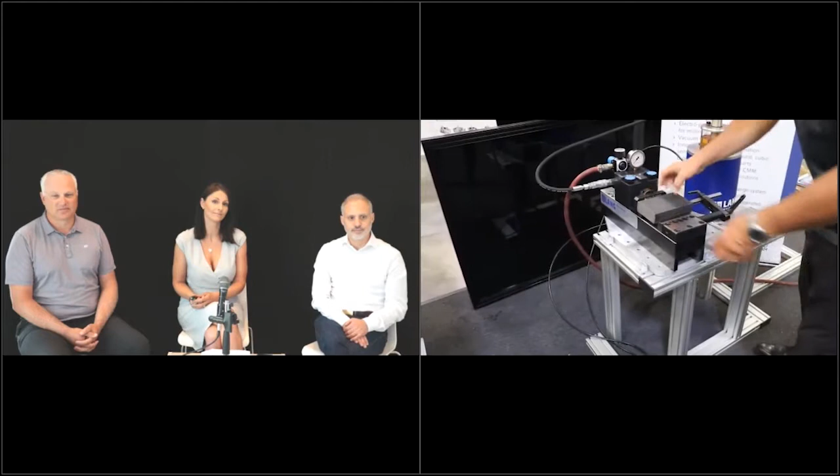As you can see right here, we start with a raw material block, a 1045 mild steel being pre-stamped by the Lang Makro-Grip stamping unit.

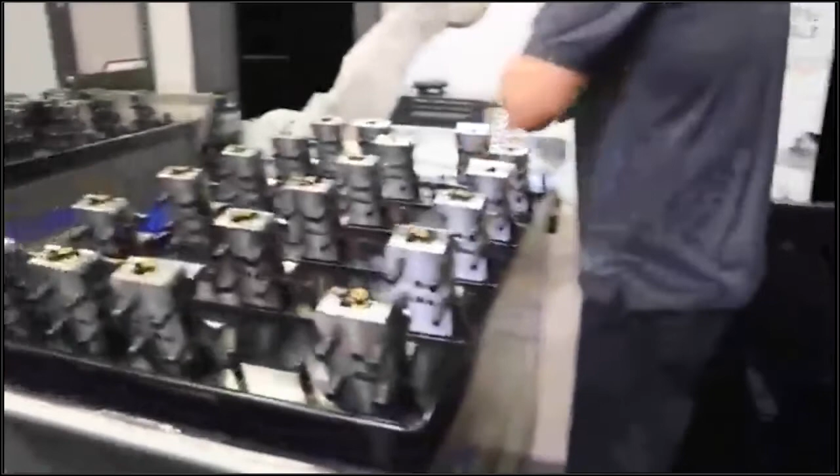This unit is optional, but recommended for harder material above 35 HRC. The form closure effect created by the pre-stamping of the workpiece ensures you hold the workpiece with constant and consistent quality and high process reliability.

Now, all that's left is to clamp your workpiece onto the Lang Makro-Grip vise, which doesn't even need to be removed from the trolley. The automation trolleys are simply mobile storage units.

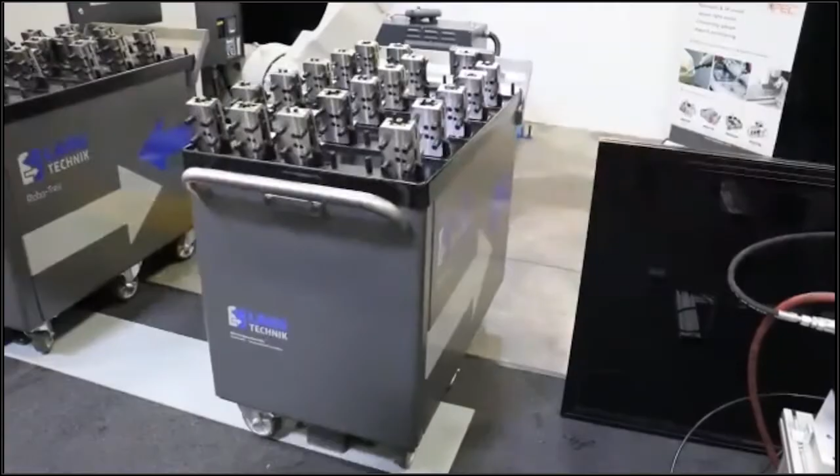Once all of your workpieces are positioned into the trolley, it's time to dock the trolley into a pneumatic docking station located on the floor. This allows accurate and easy positioning of the trolleys. An automation trolley with finished parts can be removed or replaced at any time during the operating mode.

Now we're seeing the Mitsubishi robot pick up the Lang Makro-Grip vise in order to load it into the Lang zero-point system inside the vertical machining center. The zero-point system can be actuated either mechanically by the robot itself, as seen in our demo, or pneumatically.

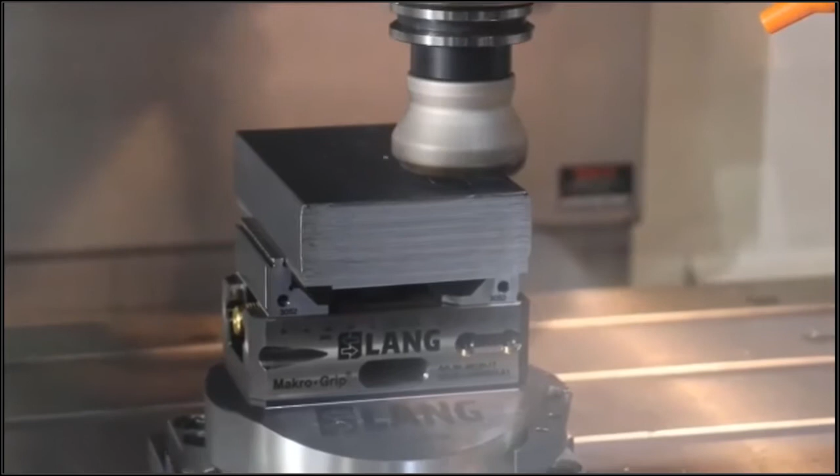The robot is pre-adjusted and pre-programmed with a simple user-friendly control. Thanks to a sensor on the robot gripper, the vises are picked up regardless of the size and shape of the component. Once the part is completed, you'll see a cool little gadget called the Clean-Tec chip fan, stored like a common tool and selected automatically via the CNC program.

This little gizmo has wings that open and close automatically by switching the machine spindle on and off, and cleans the finished workpiece and pallets prior to their automated removal. It removes chips and coolant without the operator having to open the machine doors and never having to use compressed air.

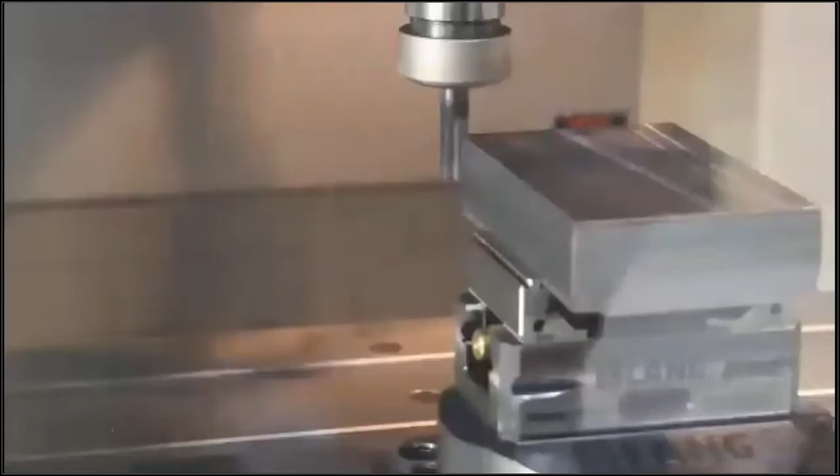I'll circle back with a little bit more detail about the RoboTrex system, the Mitsubishi robot, and Megatel's other products and services following my colleague's presentation. Thank you, and now back to you, Felicia.

Thank you, Mark. For those of you who don't know, CAD Micro Solutions is a 3D solution and service provider, enabling innovation for businesses across Canada.

We offer solutions for 3D tools in the design, manufacturing, and additive, metrology, and augmented and virtual reality spaces. We've been around since the mid-80s, and our head office is located in Toronto with offices across Cambridge, Montreal, and new offices in Alberta and BC.

Today I'm going to talk a bit more about the software tools to improve digital design and manufacturing strategies and workflows.

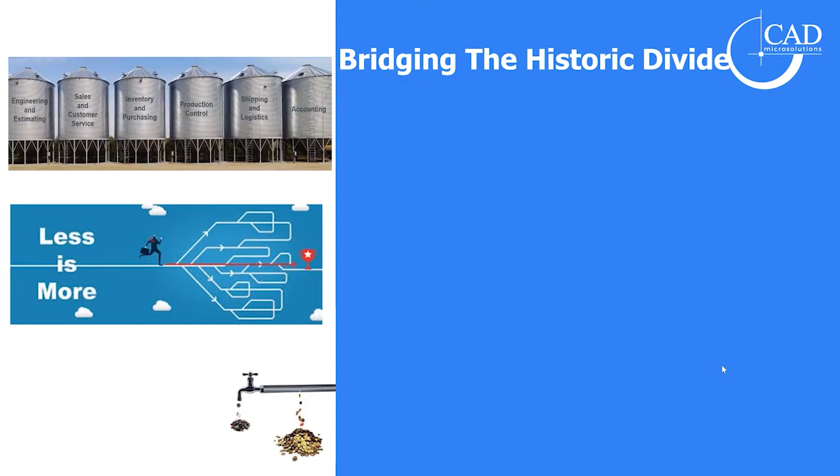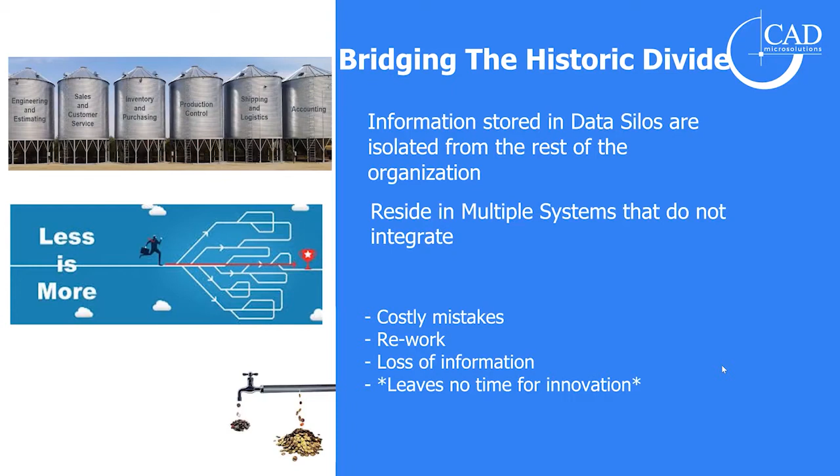As software solutions started coming online, we were able to automate a lot of the manual work that had been done in the past. And this has created data silos. Information in these data silos is isolated from the rest of the organization. They reside in multiple systems that do not integrate well. And of course, this costly mistakes, rework, and loss of information. Most importantly, it leaves no time for innovation.

If we look at what's pushing that digital strategy, in the past it's been advancements in technology, intense competition, and enhanced supply chain proficiency. These have all primarily been the reasons for pushing the need to innovate new processes for product development. Businesses not only needed to catch up, but keep up.

And now with COVID-19, it has made it more critical than ever to implement these digital workflows for the survival of business today.

Many of you have likely heard of smart manufacturing, and of course, this supports that connected and streamlined flow of intellectual properties. It delivers it to all of your team within an organization, and the information is available when and where it's needed, and in the form it's most useful.

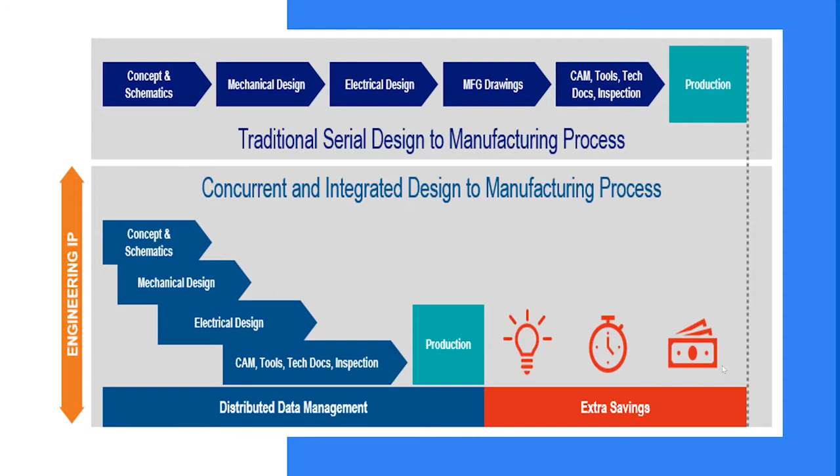Of course, this improves your quality, it reduces your costs, and increases your profitability. Smart manufacturing tools compress that design to manufacturing process. And now this can actually happen concurrently in one seamlessly integrated system.

SOLIDWORKS provides an ecosystem of tools that are needed to implement a completely digital and integrated design through manufacturing strategy, without ever having to leave that familiar SOLIDWORKS environment. With over 6 million users worldwide, SOLIDWORKS serves a number of industries with a wide range of design challenges.

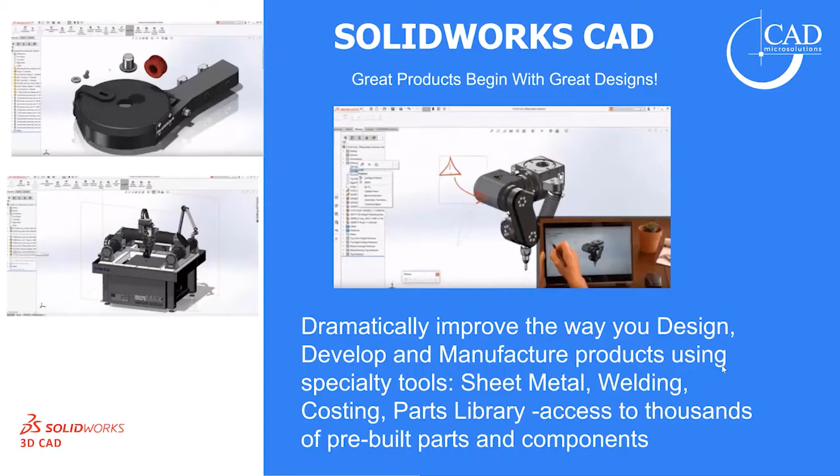We'll walk through one of these digital manufacturing workflows, starting with SOLIDWORKS CAD, which is really the core design tool in this ecosystem. It's a robust 3D CAD modeling tool, and it utilizes that parametric and feature-based modeling that will dramatically improve the way you design, develop, and manufacture products using specialty tools like sheet metal and weldment, costing, and a parts library that gives you access to thousands of pre-built parts and components.

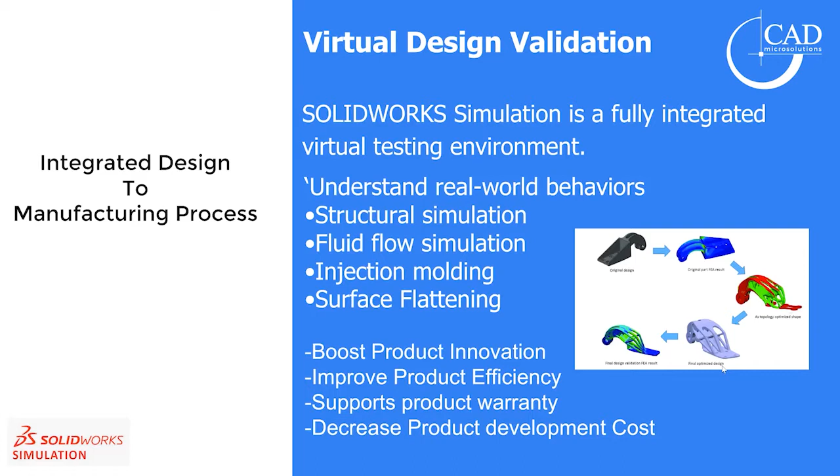Virtual designing and validating in SOLIDWORKS simulation is a fully integrated virtual testing environment, and we allow you to make sure that your designs are going to work the way you envision it. This tool validates the design by simulating real-world conditions. It boosts your productivity and product innovation, and it supports warranty and decreases your product development costs overall.

SOLIDWORKS model-based definition is an integrated and drawing-less solution that allows you to define, organize, and publish your annotations all within your 3D model. This bypasses that time-consuming 2D process and further leverages your CAD data. It allows you to comply with industry standards, collaborate with internal and external stakeholders, and share, archive, and reuse this intelligent data.

SOLIDWORKS CAM powered by CAMWorks is a powerful, parametric, knowledge-based suite of seamlessly integrated programming tools used to automate the creation of machine toolpaths based on your company's best practice. It's the first to offer knowledge-based machining with automatic feature recognition and is the only one to offer tolerance-based machining. You can program directly inside of your SOLIDWORKS interface. Your CAD and your CAM models become one and the same, so no more worrying about machining the wrong revision, and your toolpaths update automatically to design changes.

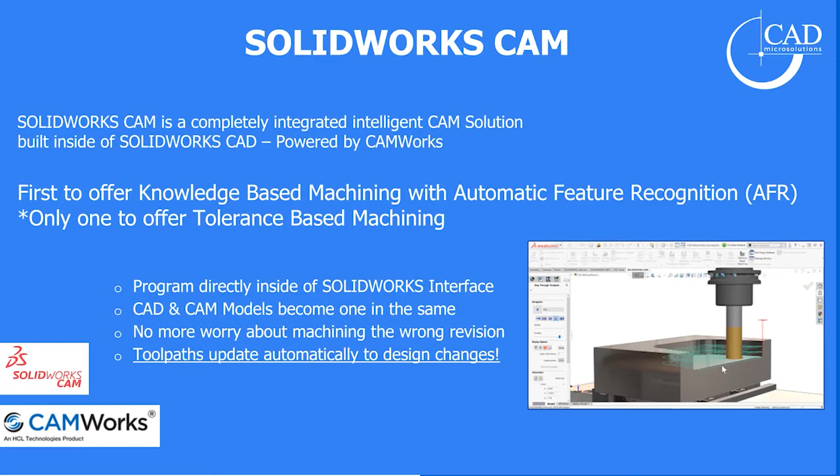With tolerance-based machining, it allows you to use the tolerances and the annotations in that 3D model to automatically create your CNC program. It recognizes the tolerances and surface finishes associated with that feature to select the appropriate tools, speeds, and feeds to generate the best toolpath.

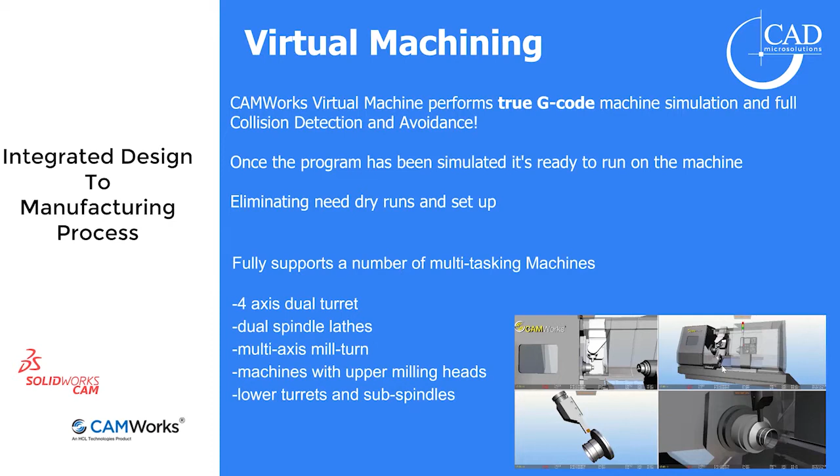With virtual machining, unlike other CAM systems that use cutting location data, CAMWorks virtual machining performs true G-code machine simulation and full collision detection and avoidance. Once the program's been simulated, it's ready to run on the machine, so it eliminates that dry run and setup, and it fully supports a number of multitasking machines.

The CAMWorks shop floor is the latest addition in this digital manufacturing workflow. It's specially designed for CNC machinists on the shop floor. It digitally delivers 3D models, including setup sheets, tool lists, and libraries to the shop floor in a single compact format. It automatically file checks, detects changes in your CAD and CAM file, and alerts users to avoid machining the wrong file. This maintains associativity along the entire digital thread. From the shop floor, you can virtually check programs, reduce setup time, increase production, and improve quality and consistency.

With SOLIDWORKS Inspection, it's both a first article inspection as well as an in-process inspection software. It streamlines the automated creation of ballooned inspection drawings and reports without ever having to leave your SOLIDWORKS environment. It reduces the time needed to create these inspection documents, helps eliminate input error, reduces time to market, and improves your quality overall.

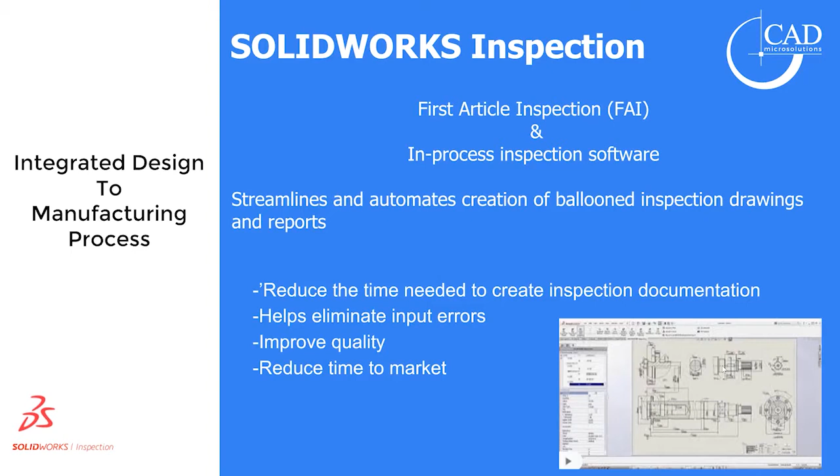By further leveraging your 3D CAD data, you can concurrently create technical documents for a number of needs, such as user manuals, manufacturing assembly instructions, interactive bills of material, maintenance and repair guides, and it's also a really great tool for product web pages and sales kits.

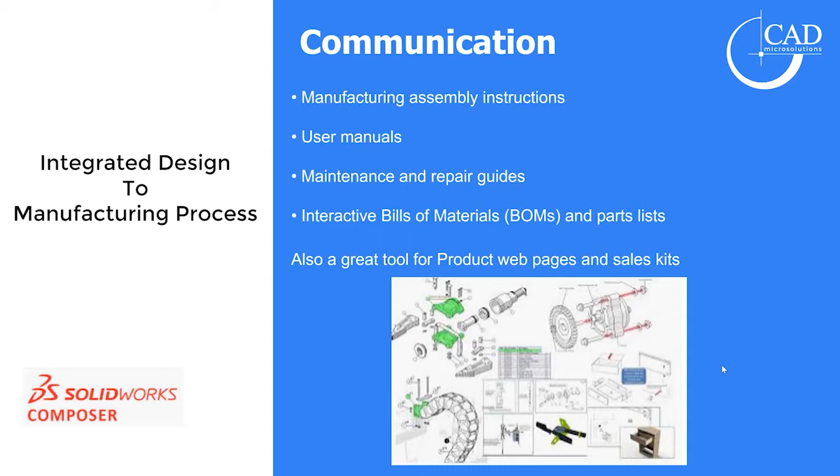Data management: SOLIDWORKS has a really great comprehensive data management solution to help customers organize and manage their data, even across multiple sites and locations. It's built into an extension of Windows Explorer and enables everyone involved to quickly find and share information. With PDM, it secures, controls, and manages documents, including CAD files, Word documents, PDFs, spreadsheets, and others.

As you can see, the seamless integration of these design and manufacturing applications into one system is truly the key to the success of digital design manufacturing processes. With that, I'm going to hand it over to Kirsten to take a deeper look into SOLIDWORKS CAM and CAMWorks.

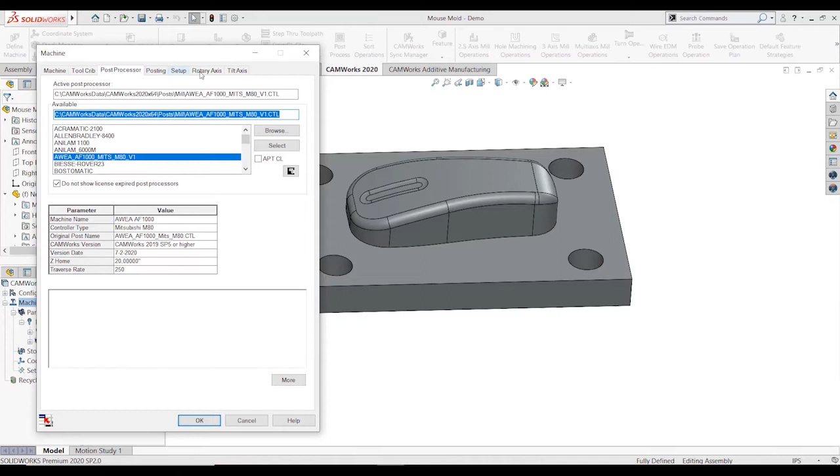Now the first thing I'm going to do is double click my machine definition. Inside this dialog box, I want to confirm that I have the correct active machine, in this case my AWEA VMC. I want to double check my active tool crib, make sure that's correct as well, and I want to make sure that I have the right post processor loaded.

I'll double click my stock manager to show you guys that I've created this stock from an extruded sketch, and I've selected the bottom face of my part model to capture my stock thickness of 1.5 inches. Other options to set my stock would be from a bounding box, an STL file, or a SOLIDWORKS part file.

If I click on my coordinate system node, I can see that I have my coordinate system set in my top left corner, and I've created this coordinate system based on a stock bounding box vertex.

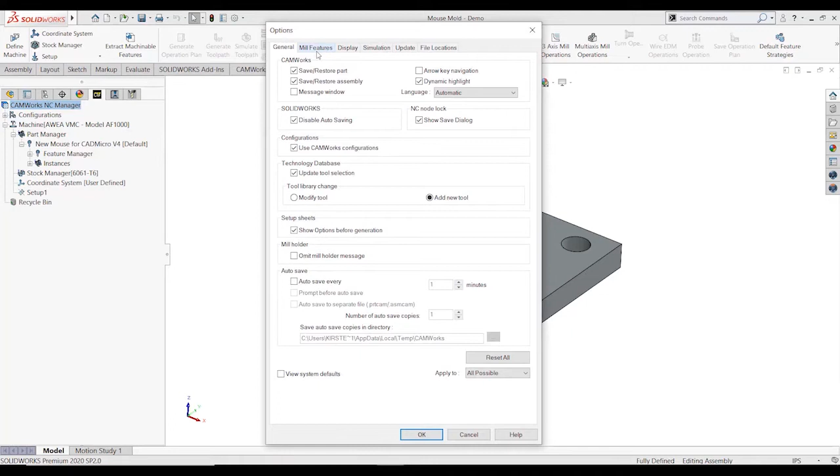The next thing I'm going to do is click Extract Machinable Features from inside the CAMWorks Command Manager. This initiates the AFR process, and CAMWorks is going to scan my model to see if it can automatically recognize any 2.5 axis machinable features. If I wanted, I could control what CAMWorks chooses and doesn't choose to find under my feature types.

Once I extract those machinable features, I have a new mill part setup, and it's found a hole group 1. If I click on that hole group, I can see all 4 holes represented in blue.

I'm going to add a couple more prismatic features to this part. From inside my feature manager, I'm going to right click my mill part setup 1, and I'll select 2.5 axis feature.

My first feature type is going to be a face feature, and I'm going to select that same sketch that I used to define my stock off of.

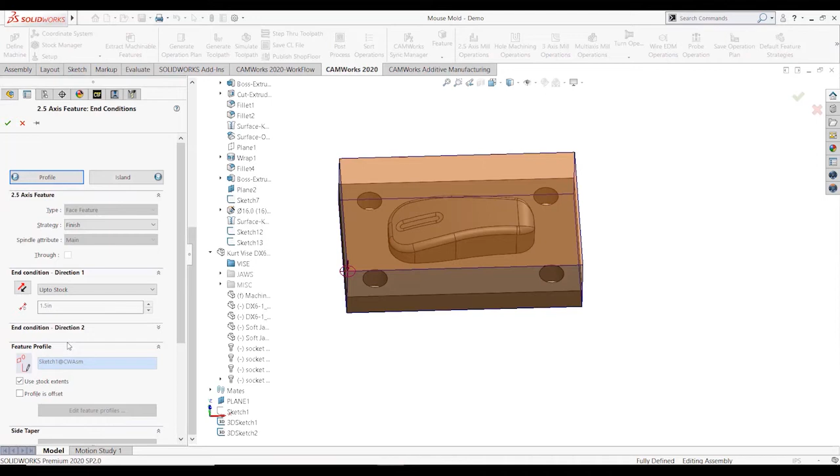I'll click End Conditions to define my depth of cut. Here I can select a strategy. Right now it's set to finish, but if I use this drop-down menu, I have other options as well. I'm going to select this finish 2-inch face mill. On the right-hand side, it's going to show me how many operations belong to this strategy - in this case, just the one face mill. It's also going to show me what tool it will select for the operation.

The next prismatic feature that I'm going to add in is going to be an open pocket. I'm going to select this bottom face here. Choose End Condition.

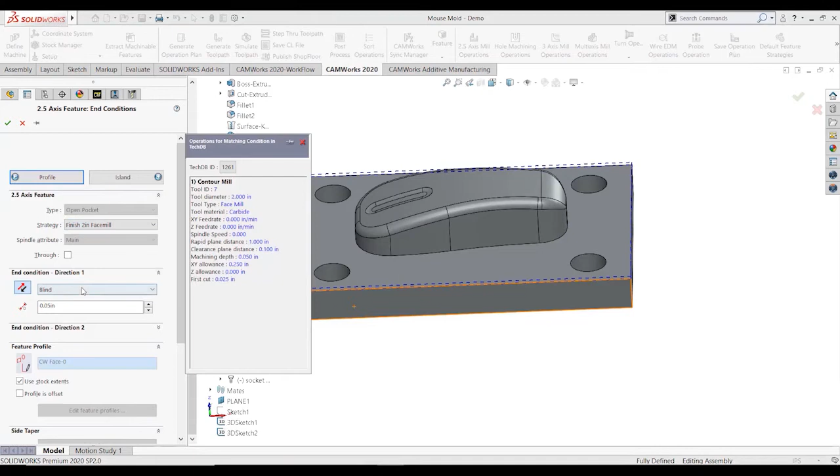This is where I'm going to select my depth of cut, so 50 thousandths. And I'm going to select that same strategy as before, because after our volume mill, we want our face mill to come in and clean up our part.

Last thing I'm going to do is select the island tab, and I just want to identify this boss in the center. I'll pick one part edge, and it's going to select the whole loop. Then I can go ahead and press OK.

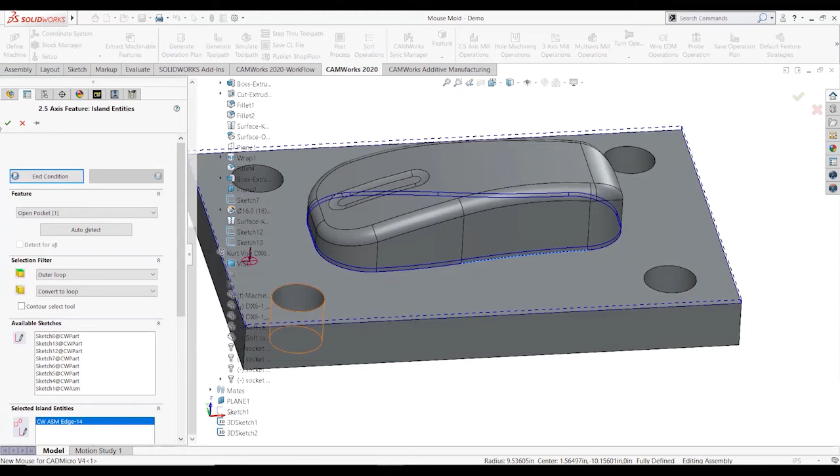The last feature that I'm going to add in is a contour mill to follow the shape of this mouse and clean up the sidewalls.

So from feature type, I'll select boss. Once again, I'll just select one edge from that boss, and it'll loop the selection for me. Then from end condition, I'm just going to switch the direction of cut and enter a depth of 1 inch.

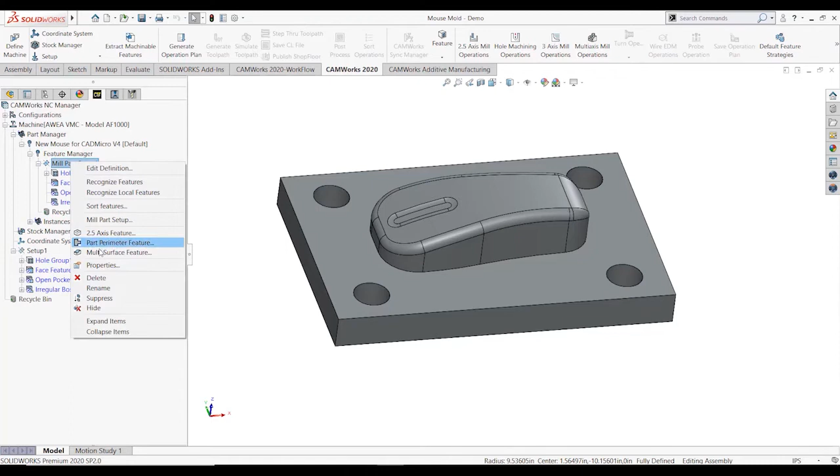So now we've got our 4 2.5 axis features identified. I'm going to go ahead and add in some multi-surface features. For the first feature, I'll choose all displayed.

CAMWorks is going to recognize every single surface on this model. For strategy, I'm going to select my volume mill. This is a CAMWorks high efficiency toolpath. It uses a large axial depth of cut and a shallow radial depth of cut to keep constant interaction with your toolpath. It can really shorten your cycle times, and it can extend your cutter life quite a bit as well.

My next multi-surface feature is going to be a knit surface selection. So I went ahead and created a surface knit. I can find it inside my surface bodies folder. When I select that knit, I can see my selected faces on the left-hand side. Creating these knits is a quick way to identify a group of surfaces and to be able to select them quickly.

And I just want to make sure that I update my strategy as well. So I want to add in a pattern project with a 1/2 inch ball nose.

My next multi-surface feature is going to be another knit selection. You can see my selected faces, and I'll choose my pattern project with a 1/4 inch ball nose for that outside fillet.

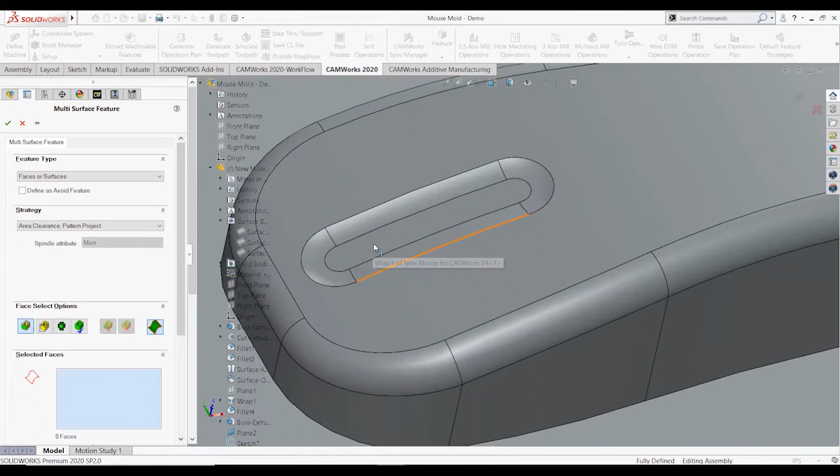And then for my last multi-surface feature, I'll just select that center face. And for this toolpath, I want to use a slice.

Okay, so we've defined all of our machinable features now. I can see them listed under my mill part setup 1, and I can see the strategies in brackets beside. I'm actually going to update this hole group 1.

Because my drill strategy is going to add in a center drill and a drill, but because of the ISCAR drill that we're using, we don't need that center drill toolpath. So I'm just going to update to a drill only strategy.

Next, I'm ready to select generate operation plan. So at this point, this is where knowledge-based machining really comes into play. CAMWorks is going to consider our machinable features, our model geometry, and the strategies that we want to use. And it's going to scan our technology database. It's going to find the feature conditions that match the conditions in our model, and it will apply the appropriate toolpaths and operation parameters based on what we program that technology database to do, essentially. So this is where we're going to save our shop's best machining practices and how we want to program our parts.

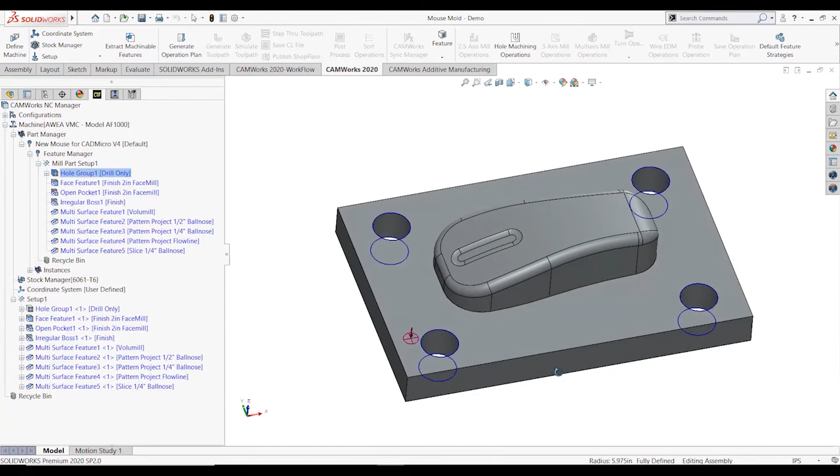Now I'll click Generate Operation Plan. And now I've navigated over into my CAMWorks operation tree. So I can click on the resulting toolpaths, but they're not generated yet. All I can see is that preview of what machinable feature they belong to.

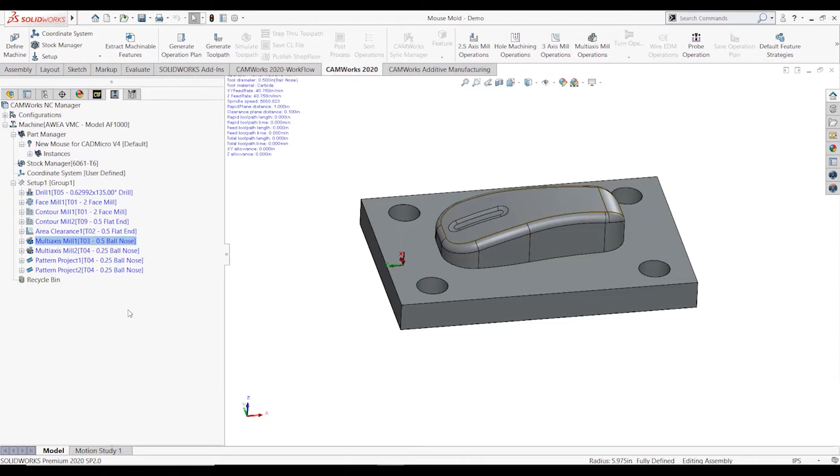So before I generate these, I just want to make a couple quick edits. Mainly, I want to identify the upper and lower curves for my multi-surface toolpaths that involve my flow line between curves.

So I'll double click a toolpath to open up the operation parameters. And once inside, I'm going to select my upper curve. In this case, I created a 3D sketch for that, so I'll just go ahead and select that. And then I'll select my lower curve, so my 3D sketch 2.

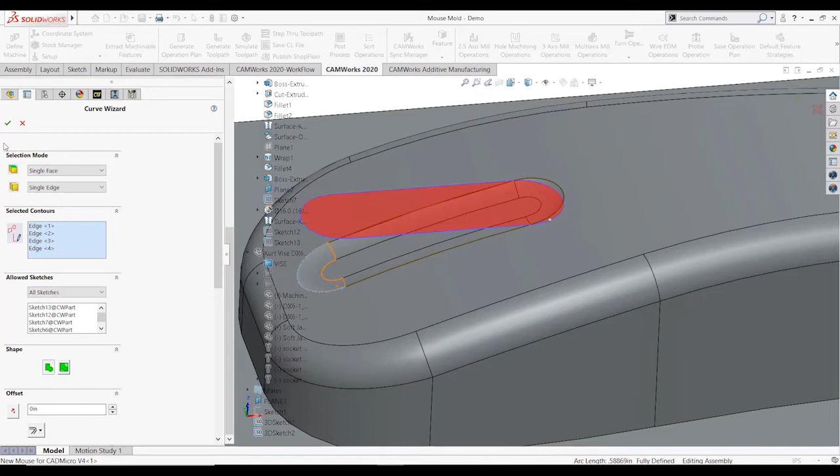Next, I'm going to update my second flow line toolpath. So once again, inside my pattern tab for curve 1, I'm going to select my part edges. For curve 2, I'll just select this face.

Now the last change I want to make before I generate my tool paths is I want to edit my drilling operation. So from drill hole parameters, I'm going to change pecking to drilling. From my feature options, I want to make sure that I add in my tip length.

And inside of my tool, I'm going to select another tool from my tool crib. I'm going to select a user-defined tool that I created based on the 3D model I downloaded from the ISCAR website. So now I get a preview of that tool, and this is especially helpful for simulation purposes.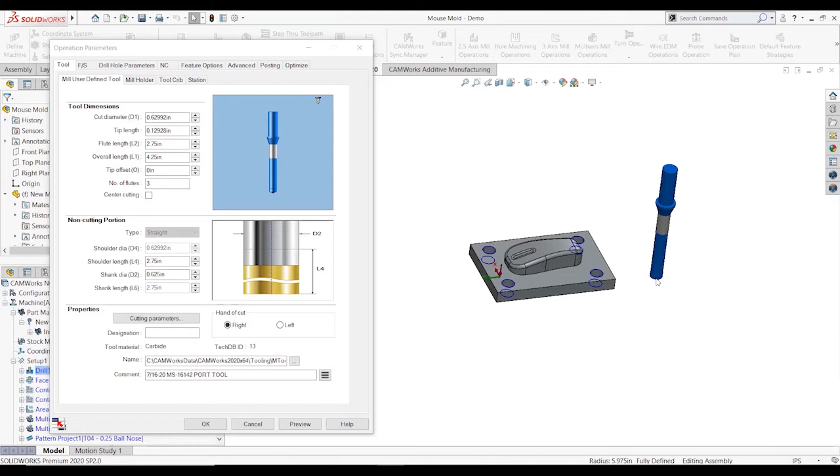Next, we'll select Generate Tool Path from the Command Manager. It's going to take the most time to generate our volume mill. So after this tool path is generated, the next step for me would be to sort the operations to make sure that I'm posting out in the order that I actually want to cut my part. And then the last step would typically be to post-process these tool paths.

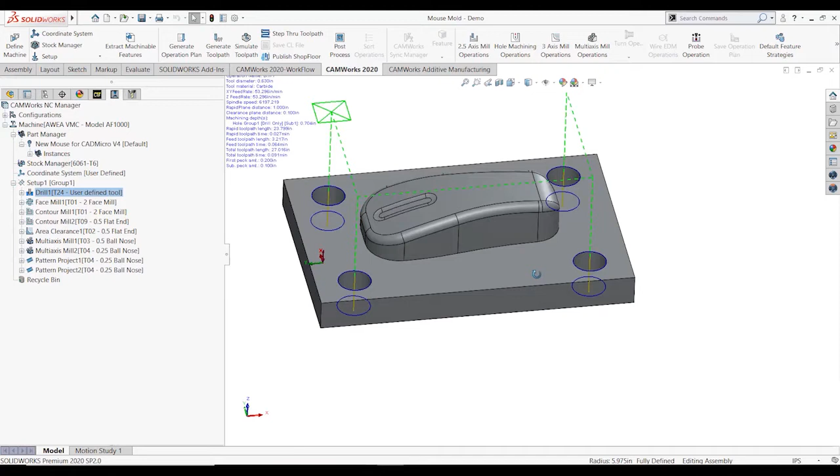But I'm actually going to be showing you guys another CAMWorks application after this, called CAMWorks Shop Floor. So instead of post-process, I'm going to be selecting Publish to Shop Floor. So now our toolpaths have generated. I'm going to right click my setup one to sort it.

So inside of my sort tab, I can choose to sort by operation type or tool, and then an additional method by either operation or tool. So we want to start with our face mill. We want our drilling to be last.

Drag that multi-axis mill above the drilling. We want our area clearance to be below our face mill. And let's go ahead and click apply and see what that gives us.

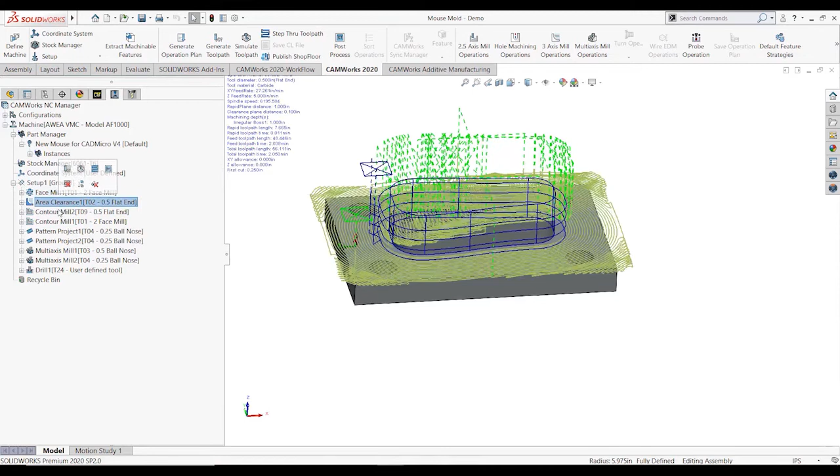So things look pretty good. I'm just going to move a couple other things around. I want this multi-axis mill to come after that contour, so I can just drag and drop.

Okay, so we'll do a really quick simulation. I can select Simulate Toolpath from my Command Manager. I'm going to choose Turbo Mode, and I'll run that simulation, so it's going to cycle through my toolpaths as quickly as possible. And then when this is finished, I'm going to select this button here to show difference.

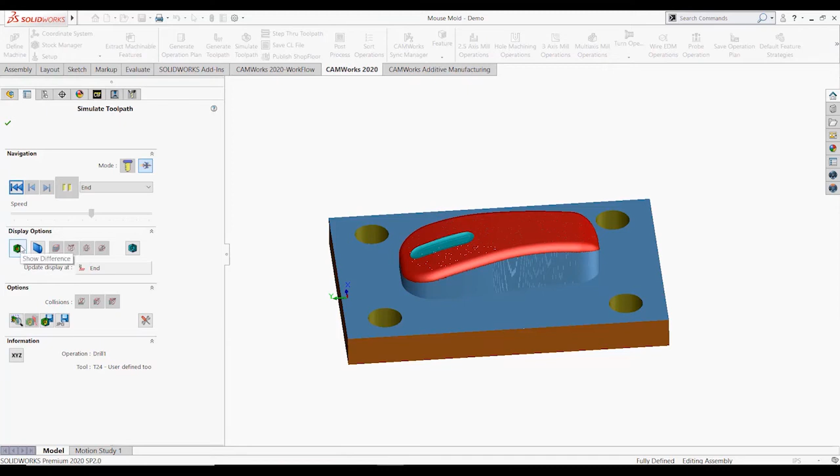So this is where I would be able to see any undercut or overcut areas. But everything in green is cut to model, so that looks good to me.

I'll press OK, and the next thing I'm going to do is save my part. Then I'm going to select Publish to Shop Floor. This is where I would choose my file location and simply press Publish.

The CAMWorks Shop Floor is a really powerful communication tool you can use in your shop to communicate all of your tool paths and setup needs from your CNC programmer to your CNC operator on the machine floor. Because typically operators don't get to see the tool paths or simulate and step through them. But with the CAMWorks Shop Floor application, they have that ability—they can see a 3D view of their part model and of the assembly.

They can simulate or step through all of the tool paths. They can also view all of the dimensional information that belongs to your model, including annotations of the part model itself. So if any changes need to be made at the machine, this eliminates the back and forth that happens between your programmer and your operator.

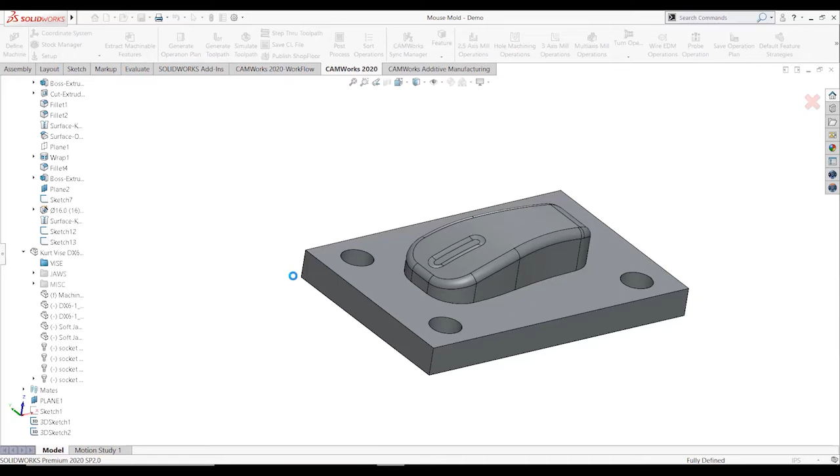The operator can simply use the CAMWorks NC editor, edit any changes he or she needs to make, and then re-simulate to make sure everything is good. This is going to eliminate setup times and the need to dry run programs.

Our shop floor file has been successfully created. So I'm just going to click open, and it's going to open it up into the application.

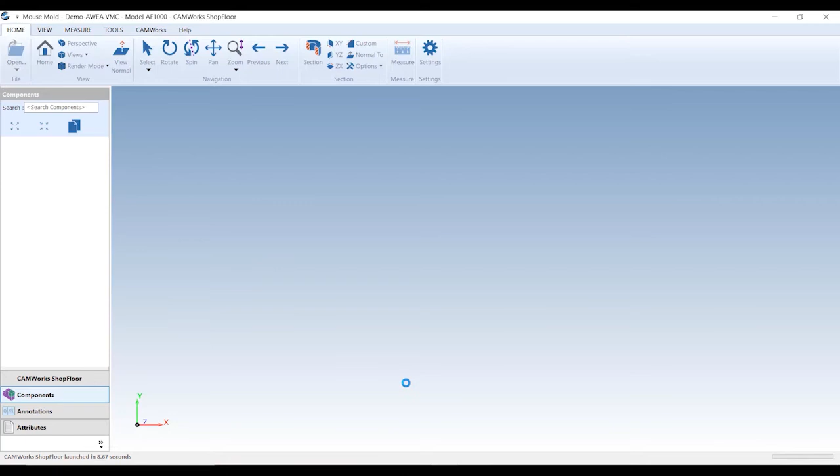So now we're inside of the CamWorks Shop Floor, just waiting for our part to load. And here from the top, I can see that I have a bunch of different tools, so I have a lot of different ways that I can view my part. I have a bunch of measure tools as well.

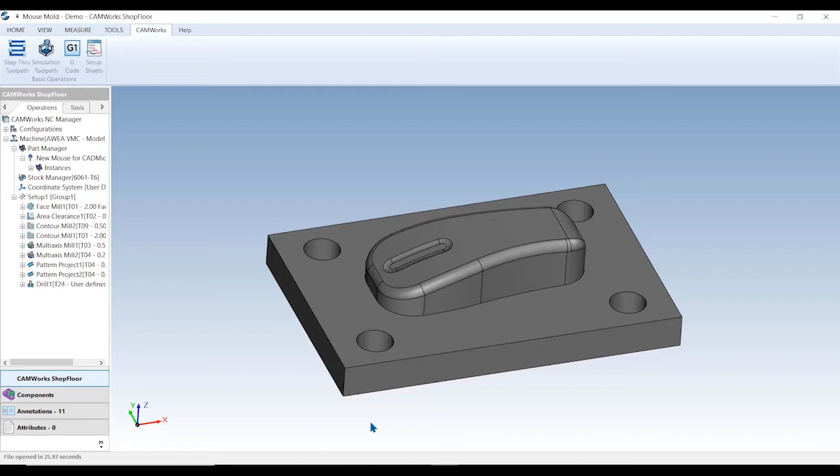And then inside the CamWorks tab, this is where I can choose to step through my toolpath, simulate my toolpath, or open up the G-code into that NC editor. So this is a really awesome and powerful tool that gives your machine operators the ability to see all of your toolpaths and all of the information stored within those toolpaths.

So I'll go ahead and exit that application. One last thing I wanted to show you guys before I finish my demo is the CamWorks virtual machine simulator. So I'm going to right click my setup one.

Actually, the first thing I'm going to do before I open up the machine simulator is assign a work coordinate system to setup one. So I'll edit that setup, and then inside my offset tab, I'll select work coordinate system. My start value is 54. I'll just select assign and OK.

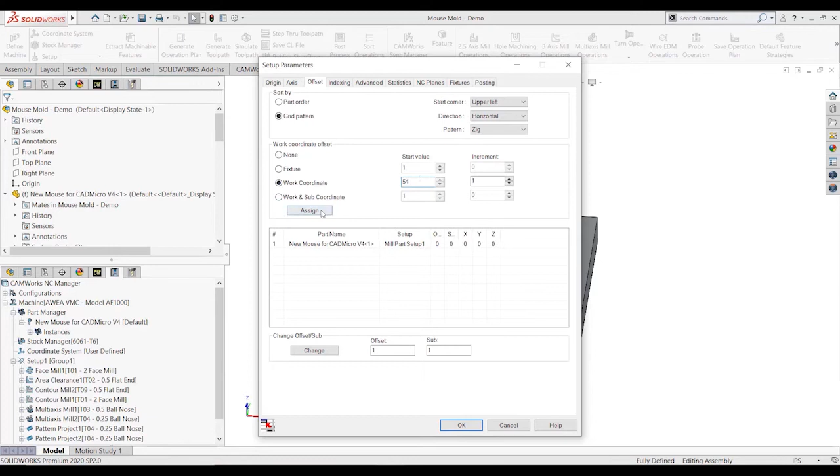Next I'm going to right click that setup, and under machine simulation, I'm going to choose my standard. This is also going to post out all of my code. Now the CamWorks virtual machine is unique—unlike other CAM software, the virtual machine inside CamWorks is using the actual G-code, not just the cutter location data. So it's going to ensure precision and accuracy in your part as well.

This is also really going to help eliminate the need to dry run your part on your machine. You're going to have full collision detection with this tool.

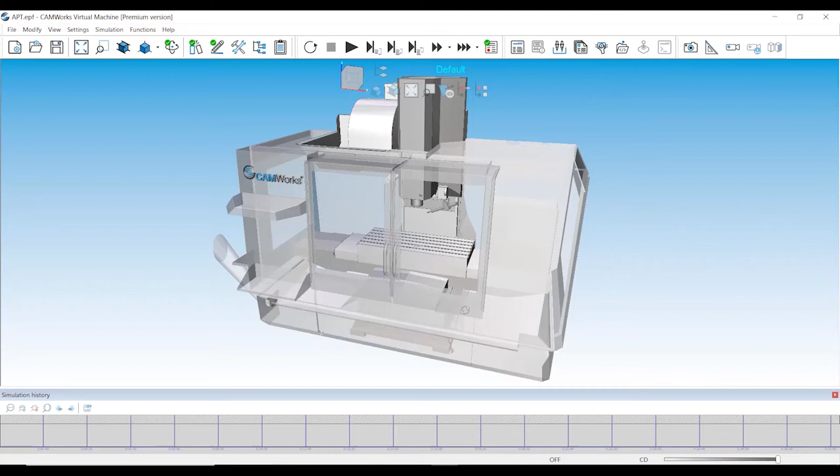So inside settings, I'm just going to update my Z axis. You can see my part on the table. And I'm just going to go ahead and press play so I can see the simulation of my part virtually inside my machine.

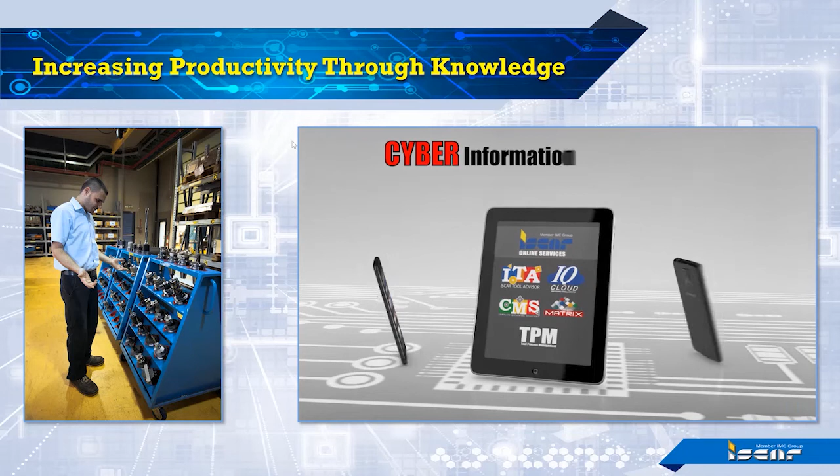There's two things I want to talk about, one being IOP, the Internet of People, and this is how people change the world around them.

We have created the internet, which has become the most transformative technology ever created. Let's see how we connect using it. We utilize the internet to read books, play games, do shopping whether on Amazon or eBay, read articles, listen to music, send emails, and of course post videos and photographs.

That brings us to the IoT, or the Internet of Things. This is using devices that allow us to connect different people to things, with the ability to sense and communicate, touch and control, interact and collaborate. So how do we do that? Well, we use smart devices such as cell phones, tablets, computers, and also machines.

As people, we have 5 main senses, but when using digital platforms, we kind of lose a little bit. We still keep our sight, touch, and hearing, and these 3 senses are what connect us to the different applications we use. At ISCAR, we have created various apps to help customers increase productivity and profitability.

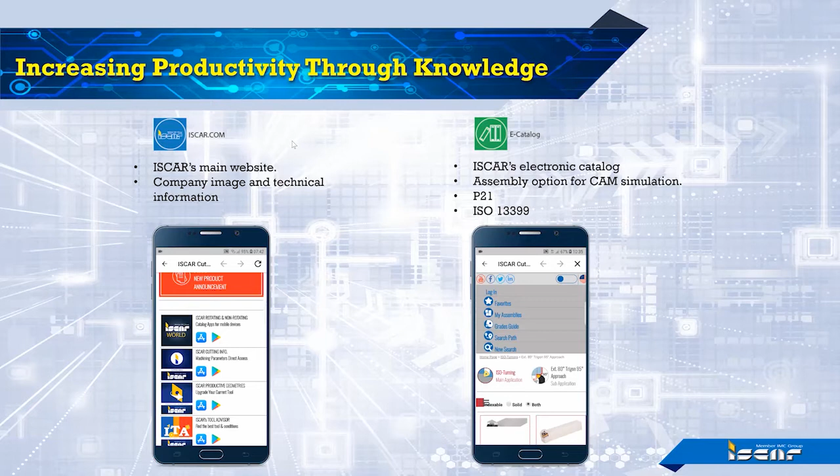We did a complete overhaul on our website to scale properly to different smart devices like cell phones, tablets, and computers. We've also completely revamped our electronic catalog, now in accordance with the new ISO 13399 standard, which all cutting tool manufacturers will have to conform to. A very useful app we created many years ago is our ITA, the ISCAR Tool Advisor.

This app allows you to input data and have the software select the proper cutting tool, insert grade, and chip former based on the material and part configuration you enter. One of our latest apps, launched this year, is ISCAR 4 Pro, an app that reads QR codes embedded into a cutting tool or insert, giving you key product information, stock availability depending on the warehouse, and various grade, size, and geometry information. Let's have a quick peek at ISCAR 4 Pro.

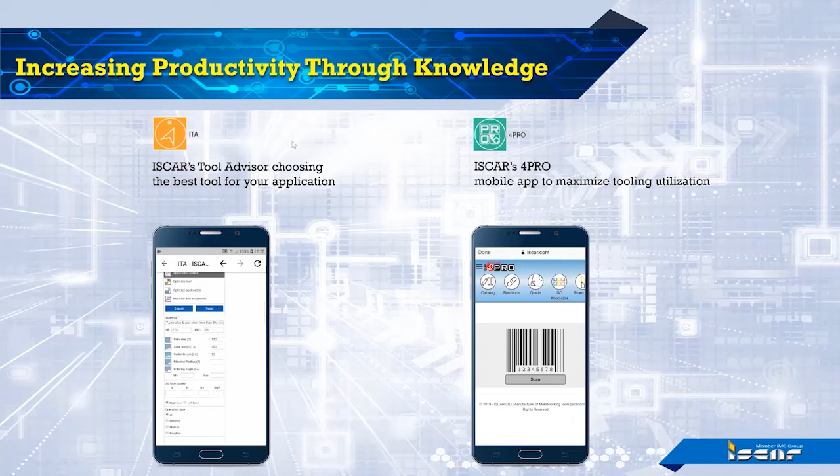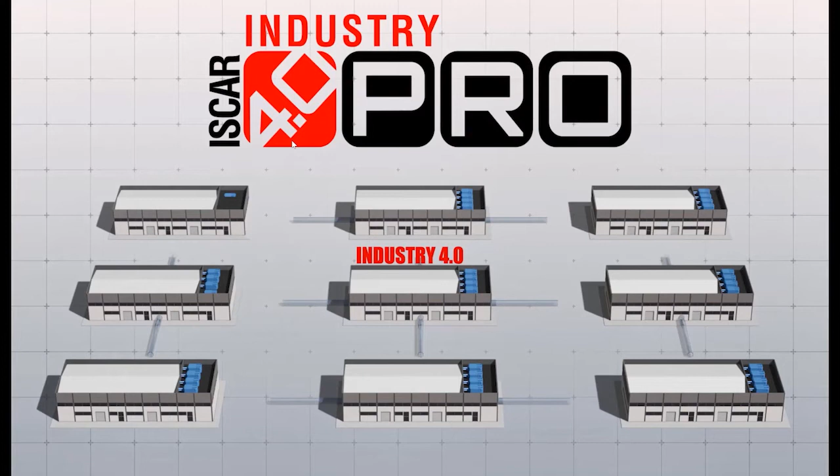The metal cutting tool industry is becoming increasingly more digitized. Valuable cloud information to support your daily production environment is simply a click away. ISCAR introduces 4 Pro, a new online product information and machining recommendation tool. 4 Pro characterizes the enormous impact of Industry 4.0 on smart factory operations, maximizing connectivity to increase productivity and reduce costs. Combining new technologies with manageable applications, 4 Pro provides machining recommendations geared to your needs.

4 Pro is now compatible with any operating system, enabling you to view vital process planning data in real time before beginning the machining process, ensuring that the selected tools and inserts deliver machining results to meet your needs. Simply scan the 2D data matrix barcode etched on your ISCAR tool or insert packaging label to access the data you need to make an informed decision.

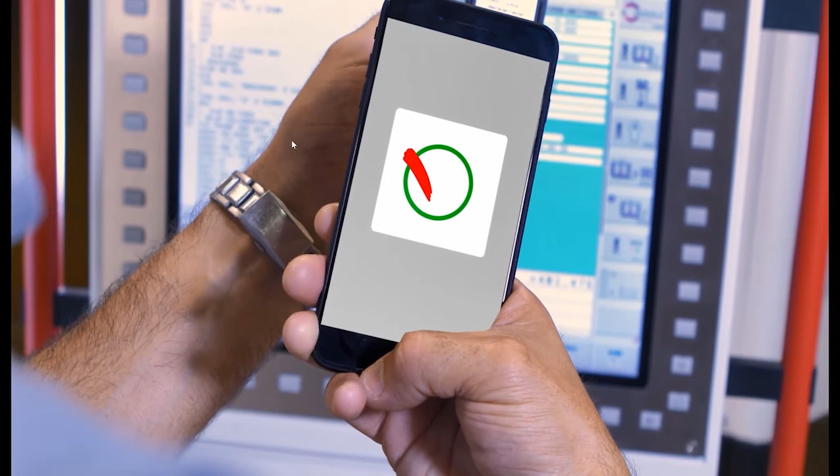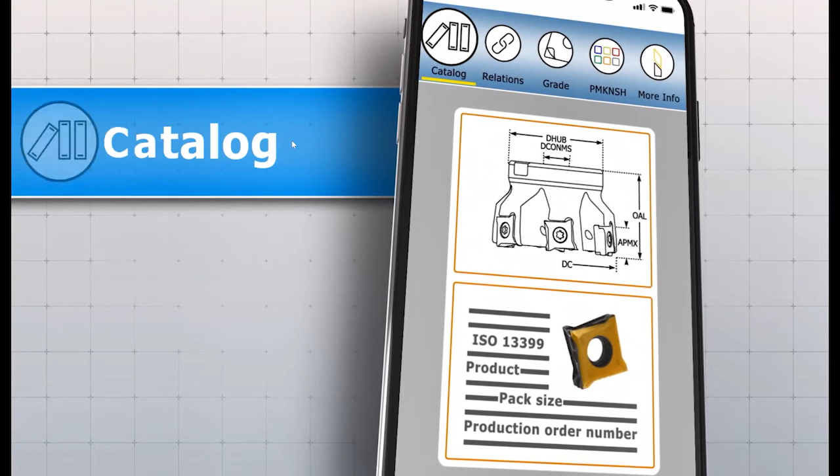The Catalog option introduces product geometrical information, presented according to the ISO 13399 standard, including the product, pack size, and production order number for traceability at your end. The Relations option ties together inserts and tools to match them up, with complete information provided about every product. The Grade option bonds the insert geometry and its coding to the correct type of metal, allowing you to make better choices at the planning stages of the process.

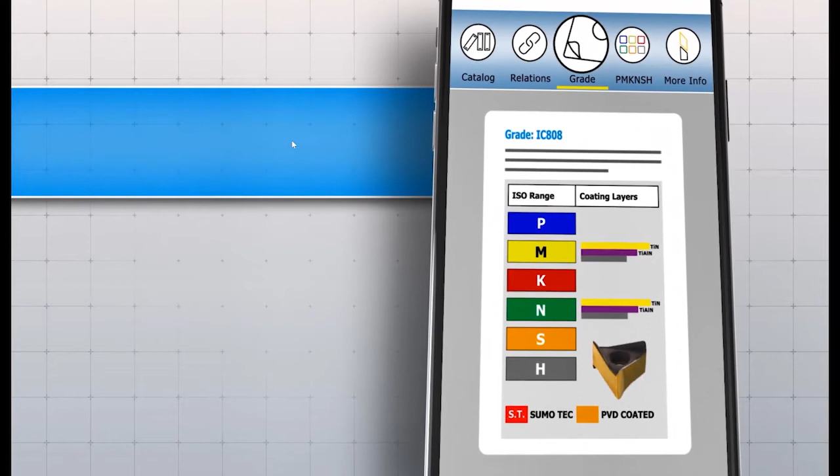The ISO PMKNSH option provides recommended cutting speeds and feeds for machining any type of metal according to the suggested ISCAR grade. The More Info option provides additional product information which may be essential for your work and process planning.

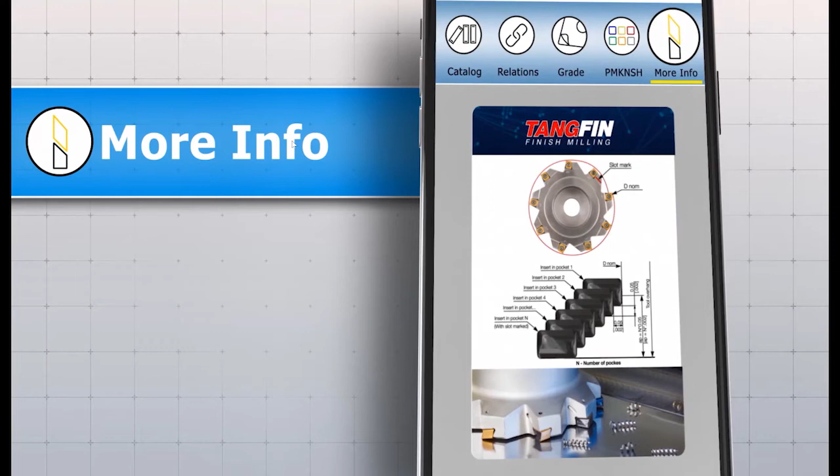In the My Zone option, you can create a project and assign the respective tools and inserts that will be used. Here you can record how many hours the tool was used, the number of cycles it has performed, and whether or not the tool has been reconditioned.

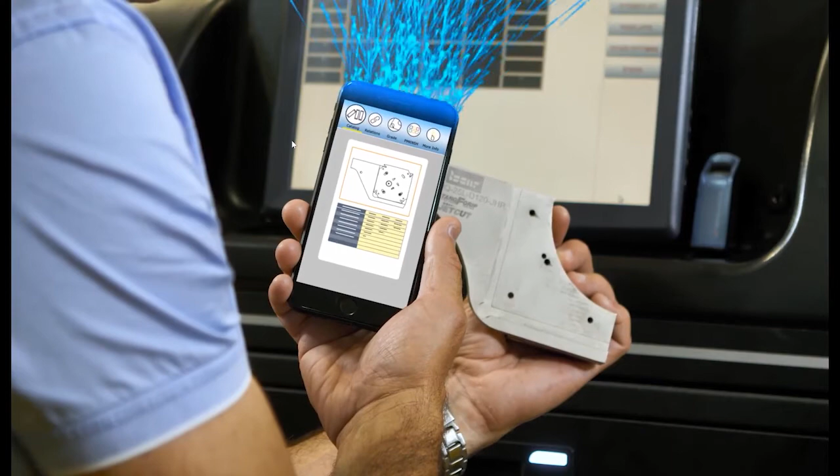Make informed decisions for your tooling needs by simply scanning the 2D data matrix barcode etched on your ISCAR tool body. 4 Pro will help you manage the tools stored in matrix dispensing machines more efficiently, with even more digital connectivity functions for smarter inventory management.

Through 4 Pro, you can access a range of valuable digital web resources, such as grade and geometry calculators, ISCAR tool advisors, and a bank of industrial solutions for parts, all in one place at your fingertips. 4 Pro, tools that deliver machining results to meet your needs.

One problem we have with creating physical catalogs is that because we release products almost daily, printed versions become out of date very quickly. So within the ISCAR world, you can access our NPA, or New Product Announcements, which give detailed information on all the latest products ISCAR has developed.

Another useful app we created is called Industrealize, where you can look by various industry types like automotive, aerospace, mold and die, and many others, and see what type of workpieces ISCAR has expertise in, the different materials we have knowledge in, and the cutting tools specifically designed for those materials, workpieces, and industries.

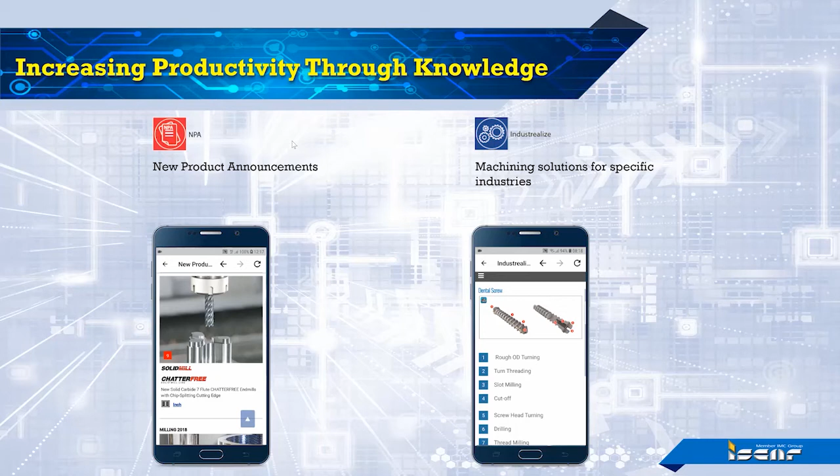As with any app, we also have FAQ, so you can see frequently asked questions and common answers. Should you have a question not listed in our FAQ app, no problem—you can enter a custom question which gets sent to our head office, and you usually receive a response in 24 or 48 hours. Another useful app we've created links to our media pages like YouTube, giving you access to our Tech Talks, which provide useful information on new products in video form.

Another thing we've added is our e-commerce app, which allows customers and distributors to purchase products directly through the app, sending orders right into ISCAR. Whether you take advantage of this app or not is completely up to you.

Another thing we've done is with our publications. Because our catalogs become out of date once printed, having a web-based publication, as you see here, allows you to have a complete up-to-date catalog, and also the ability to download an offline version should you go into an area without internet access.

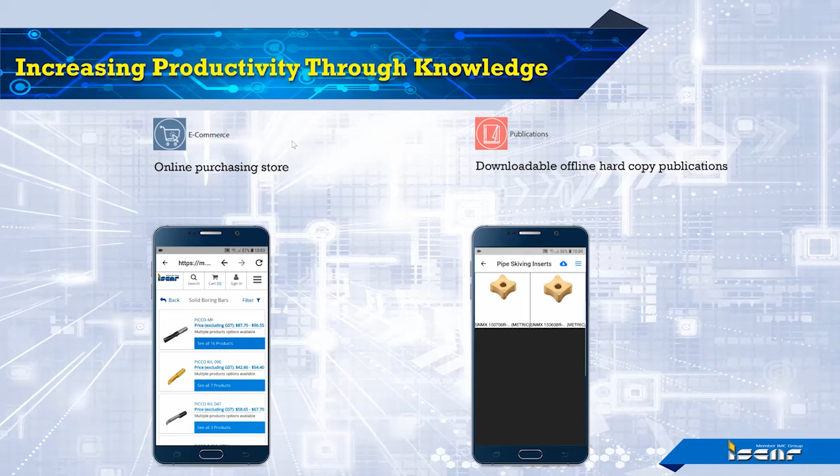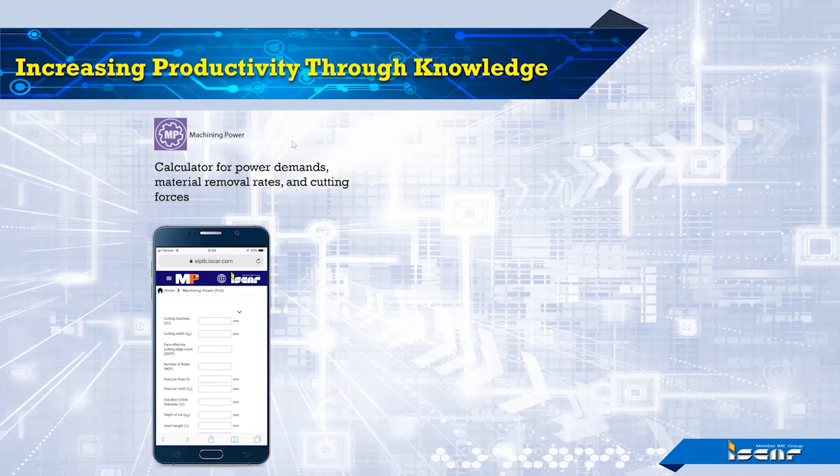We also have Machining Power, which is a complete machinist calculator, allowing machinists on the shop floor to get speed and feed calculations, horsepower requirements, and things like that. Also, we have a Matrix app which allows you to check inventory on your matrix machine to see how much you have left in stock, when it's time to reorder, and also for adding new product to your cabinets.

Another useful app is our insert wear section, which we've completely revamped. Before, the ISCAR wear app would just give you generic wear and generic solutions to those types of wear. Now we've divided all the wear into specific products—for milling, hole making, turning, and grooving—so you can go into the specific section and look at specific wear for those specific types of cutting tools and how to properly fix those wears.

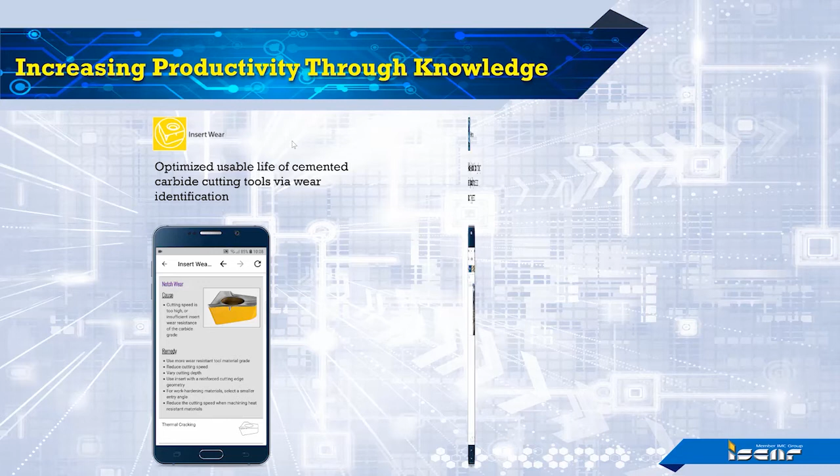We've also released some conversion software apps. One is our Grade Optimizer, where you can input a type of grade you're using from a current competitor and see what the ISCAR equivalent would be. Also, for chip formers, you're able to enter a current competitor chip former and convert it to what the ISCAR equivalent would be.

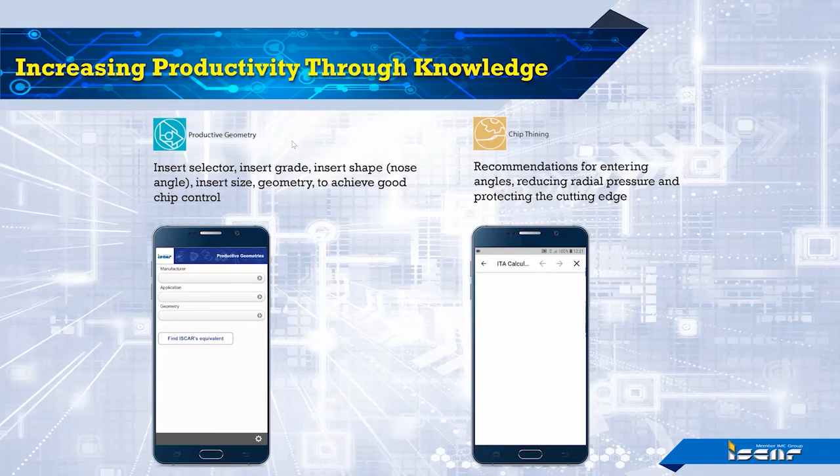We've also released a chip thinning calculator, which allows you to enter radial engagements as well as lead angles for different types of cutters, so you can properly program real feed rates rather than a feed rate that would be underpowered for the type of cutting tool you're currently using.

Our Mill Thread Advisor is an app that allows you to select the appropriate type of thread mill for your workpiece based on material type, thread pitch, and overall thread profile. This program will also allow you to generate the appropriate G code that you can copy and paste right into your CNC program.

Now, of course, with ISCAR, we have to be a part of all social media channels. We understand not everybody is just going to be part of Facebook—there are always new social media channels popping up, and ISCAR wants to be a part of all of them, because even future customers will have a social media channel they prefer, so we need to be everywhere to reach all of our customers.

And as always, we have a contact app which will allow you to get a hold of your local ISCAR rep or subsidiary. So in case you haven't seen your sales guy, or if you're in a remote area, this is a way for you to reach out and contact us at any time.

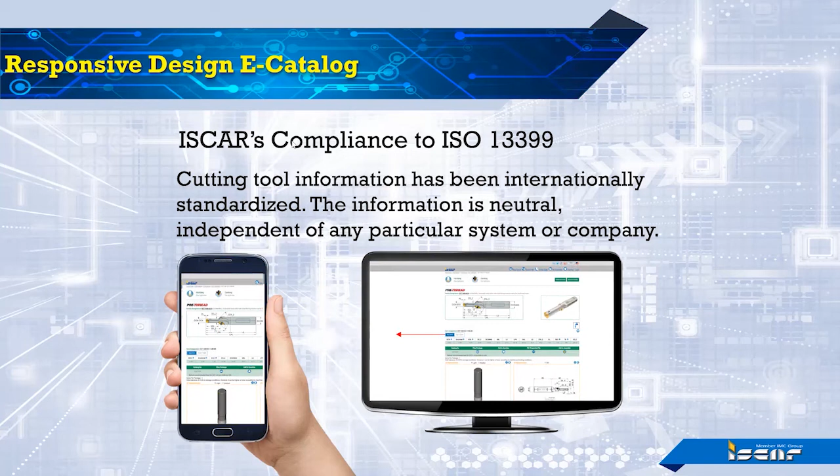One thing we've added to our electronic catalog is the ability to build and download full 3D models of our cutting tools. This is currently available for our hole making, milling, and turning product lines. Our grooving product line is to follow. This allows you to build a full assembly of the cutting tool right from the pull stud to the cutting edge.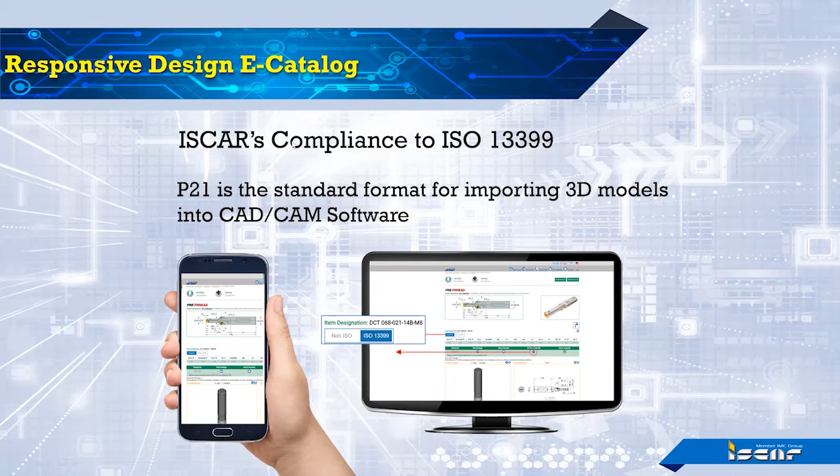You can then import this 3D file into any type of software you're using, like SOLIDWORKS. Not only can we provide a full 3D assembly of the product, but we also give you a 2D representation, completely dimensioned, so you can use it in setup and data sheets.

So basically, to end, what is the Internet of Things and why should you care? Well, let's watch this video.

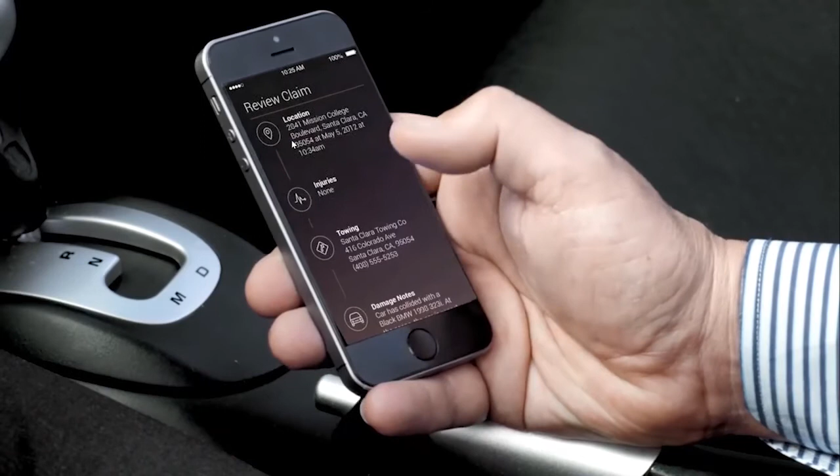No, it's just construction, that's all. No, I'm not driving. Are you okay? Yeah, you? I'm good. Oh, no, not you. Listen, I'm gonna have to call my agent. Mr. Burton, I'm gonna get right back to you. Mr. Burton, this is InsureCorp. We've received sensor data that indicates you were in an accident. Are you injured in any way? I'm not injured, no. Is anyone else injured? I don't believe so. Okay, where's my agent's number? We have pinpointed your location, and we are showing your car is not drivable, so we are dispatching an Uber car to take you to your destination. That would be great. I'm pressing 1. English. May we give your coordinates to our appraiser drone to perform the appraisal? Absolutely. We have received the photos, assessed the damage, authorized the repair, selected a qualified repair facility, and have dispatched a tow truck to take your vehicle to that facility. Perfect. Yes, hi, this is... Yes, I'll hold. We have looked up the other vehicle's insurance, transmitted the appropriate data to create the claim, and filed the California SR1 accident report. Can you confirm the information is correct on your phone, then hit the accept button? I'll check it right now. Okay, all done. Thank you. Your Uber car is arriving now. Ah, I see it coming. Accident, not payment, accident. Your tow truck should be there now. Don't forget to leave your keys in the vehicle. Thank you for using InsureCorp, powered by Pivotal Labs.

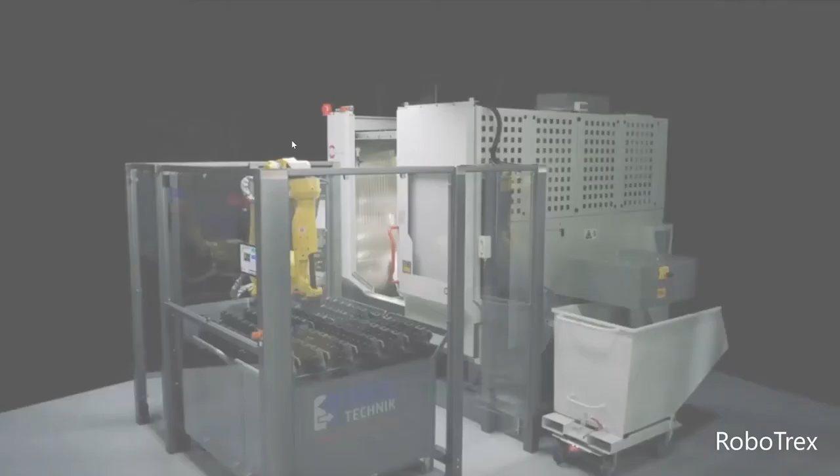The new Lang automation system RoboTrex stands for simple operation, high flexibility, and especially cost-efficient working. The heart of the RoboTrex system is the automation trolleys with their unique, vertically arranged clamping devices. This allows for a storage capacity of up to 168 work pieces with comparatively small space requirements.

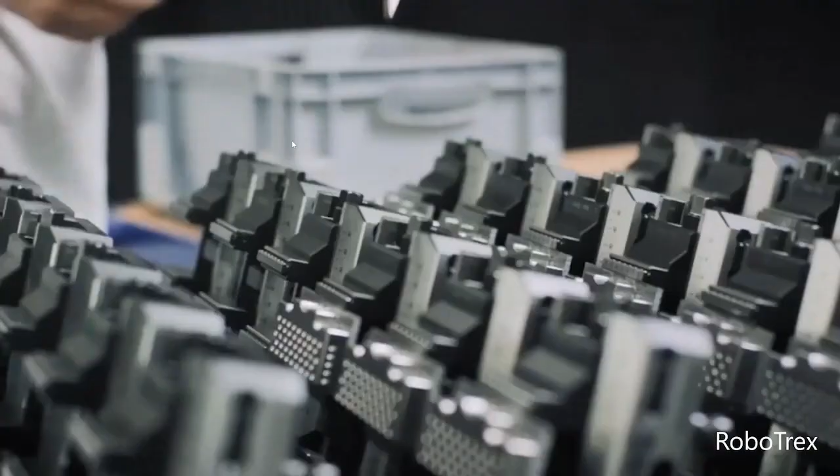Thanks to the arrangement of the clamping devices, great accessibility is achieved when loading work pieces directly onto the automation trolley. In the case of particularly large work pieces, devices can also easily be removed for external setup. In combination with the patented stamping technology, the Makro-Grip 5-axis vices guarantee the highest holding forces at small interference contours.

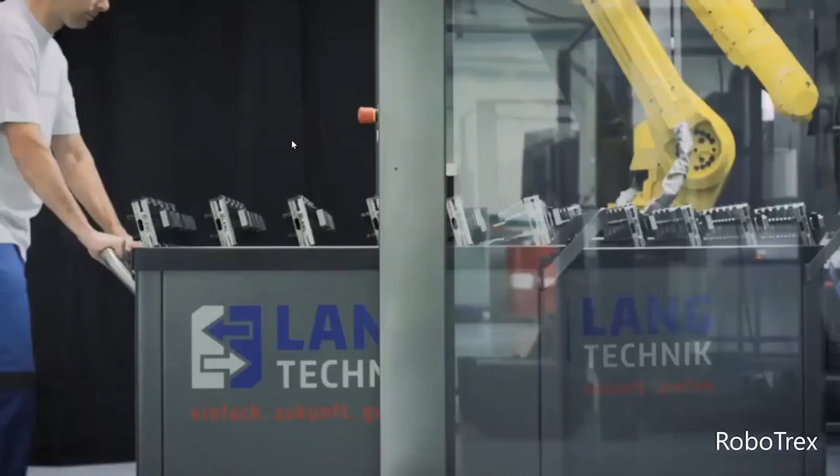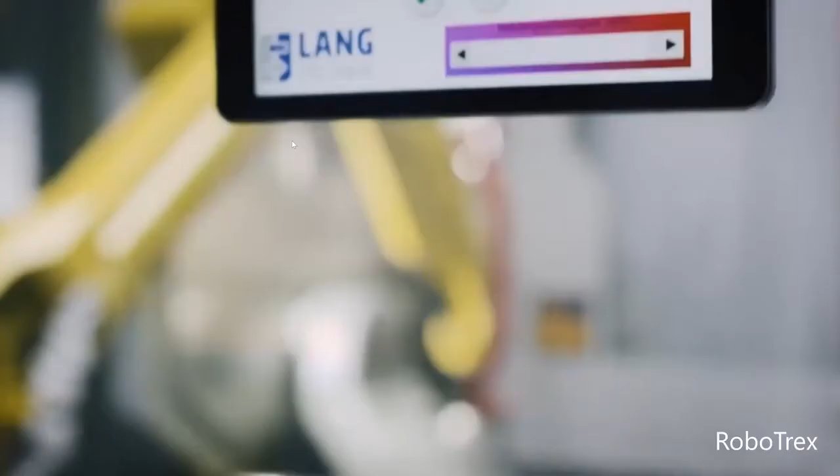The externally prepared automation trolleys enable RoboTrex automation to be re-equipped within seconds. This ensures that no unnecessary machine downtimes are caused. A simple and intuitive control is essential for us. Knowledge of robot technology is not required with the RoboTrex automation system. By simple interruption of the work cycle, measurements or similar can be carried out during the machining process.

The adaptable protective fence makes it possible to attach it to almost any machine tool. Depending on the type of machine, the connection takes place as front or side loading. There are also a variety of assembly options with 2 or 4 automation trolleys. Efficiency, speed, and flexibility—RoboTrex meets the requirements of future-oriented manufacturing.

So as you can see, Lang offers a complete work holding and automation solution that fits most applications. From the stamping technology that allows you to pre-stamp the workpiece in order to be fitted into the Lang Makro-Grip vices, to the zero-point system, automation trolleys, and the Cleantec chip fan.

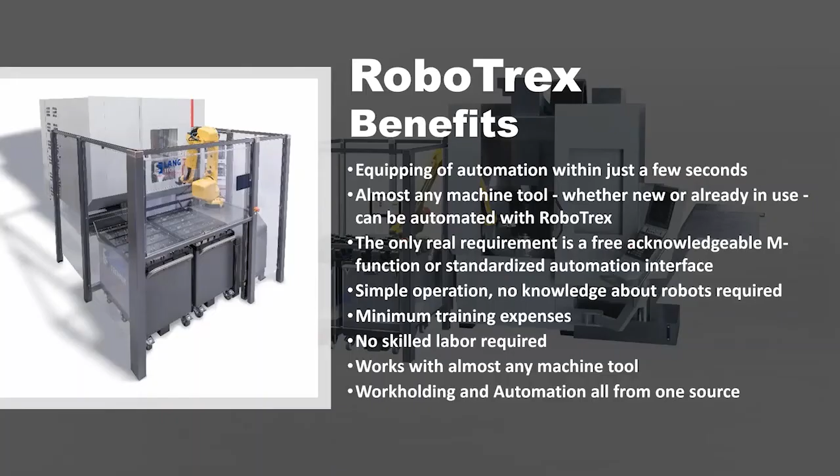What are the benefits? One of the most interesting benefits of the RoboTrex system is that it can be fitted to almost any CNC, new or used. The only real requirement is a free M function. It's really simple to use with very minimal training required. All your work holding and automation accessories from one source.

Let's talk a little bit about the Mitsubishi robot that we saw at the beginning of our demo. This robot is a 70-kilo articulated arm that has a reach of a little bit over 2 meters.

This robot allows for simple plug-and-play connectivity to Mitsubishi CNC, connected through a single LAN Ethernet cable. Once connected, this system can be easily programmed straight from the CNC touchscreen by direct robot control. This feature is also nice for simple modification of movements for project changes.

All this automation can be monitored from your phone for lights-out, unmanned machining. It's a perfect robot and simple CNC automated system for companies new to automated machine tool tending.